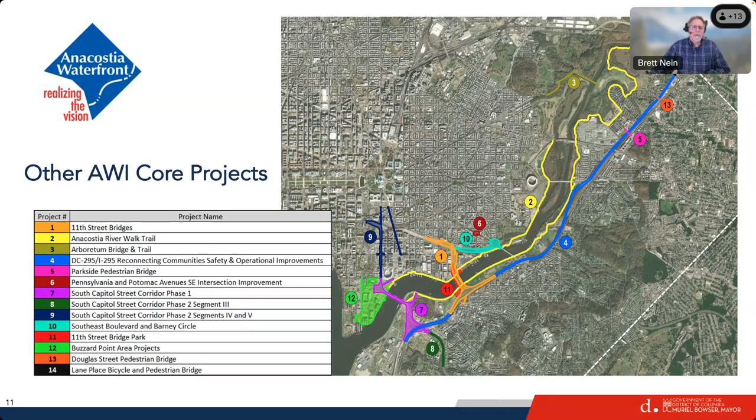So the map that I mentioned—this is the core projects, those already underway or completed and identified on this map. You'll see this project itself is tagged as number 4, which is the DC-295 study. This gives you an idea of all the different projects going on within the district. One that's very talked about recently is the 11th Street Bridge project, number 11 down in your Ward 8, where connection comes across to the corridor from 11th Street.

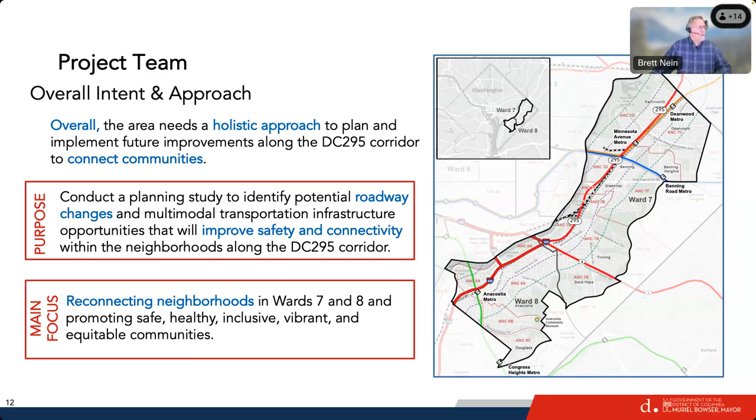It's a location-based approach, similar to what DDOT employed for the corridor project related to South Capitol Street and the Frederick Douglass Memorial Bridge, or what VDOT is using for the I-66 corridor, where improvements are underway now.

That corridor map on the right illustrates the study area considered under this scope, as well as the freeway and railways that divide it, and provide the separation between Ward 7 and Ward 8. Go ahead and switch the slide.

What we're in now is phase 1 of the study, the first study period, with phase 2 being the second. The first one is focused on considering current conditions, stakeholder interests, public involvement—that's you all—and contemporary best practices, as well as strong reference documents like Move DC and Vision Zero DC. Those have priorities we're going to really try to focus on implementing.

It will build on the previous analysis and recommendations from 2015 and 2017, where safety and geometric improvements were included in those studies. It has 5 key subtasks identified here: project management, stakeholder and public outreach, establishing existing conditions, data review and analysis, and finally the existing conditions report—in other words, creating analysis and showing what our recommendations are.

It'll be focused on things like improving access to frequent transit routes and facilities, access for communities, jobs, facilities, public service destinations, and reducing safety risk. We'll also review and refine previous DC-295, I-295 mainline and interchange concepts that were seeking to improve vehicular flow, addressing congestion concerns that create problems for you all as well. Go ahead and switch to the next slide.

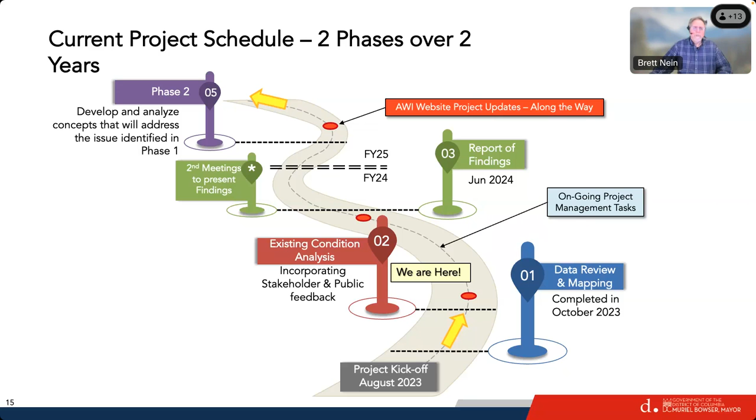Along the way, there are AWI website project updates and the Engage DC platform that Karen described. After completion in fiscal year 24 of phase one, we'll move directly into phase two, which we think will be done next year.

So go ahead and switch over to the next slide. At this point, now that I've explained the intent of the project and everything involved in the scope, we're going to transition to the map series that Karen mentioned. This covers a lot of details.

We have completed over 100 aspects of mapped corridor existing conditions. Don't worry, we're not going to show you all 100 tonight. What we're doing is focusing on the ones we think have the most impact.

Are you ready? Yes, I'm ready. Thank you.

Thank you, Brett. Good evening everyone. My name is Giri Kilim, a senior transportation engineer from Jacobs, supporting DDOT on this study. I'll provide an overview of the current status of transit coverage within the study corridor, and also the safety aspects within the study area. But more importantly, we'd like to take this opportunity to get your valuable input for the reasons Brett mentioned a few slides ago.

So let's start with the transit coverage in the study area. Next slide, please.

What you see here is there are 4 metro rail lines accessible through 5 different metro rail stations throughout the study area. To the south, within Ward 8, there are 2 stations, Anacostia and Congress Heights metro rail stations. There are no direct metro rail connections on the northern side of Ward 8 within the study area.

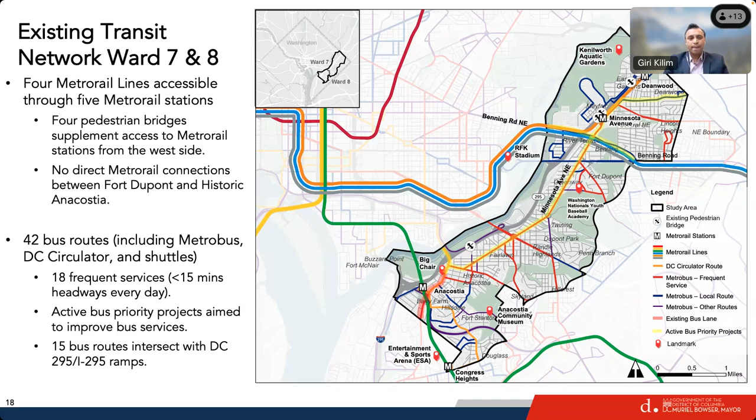What's relevant to our project within this particular focus area is that 15 bus routes actually use the 295 corridor ramps, whether on or off ramps. We are in the process of identifying any mobility, safety, or operational issues that the 295 corridor currently has that impact traffic and transit operations. When we find that, we'll document it in our existing conditions report.

Next slide, please. We also looked at the walkshed for the metro rail stations. With the Anacostia metro rail station having access on both sides of the 295 corridor, users will be able to walk to one of them within 15 minutes, even if they live on the west side of the 295 corridor near the stations. There are also pedestrian bridges being planned near 11th Street and Suitland Parkway that are expected to improve the walking experience and also improve safety for walkers and bikers.

As we continue to assess the need and identify issues and gaps, we would very much like to hear about your experiences accessing these transit services or facilities, and help us understand if you've experienced any mobility barriers that the 295 corridor poses to accessing your transit facilities.

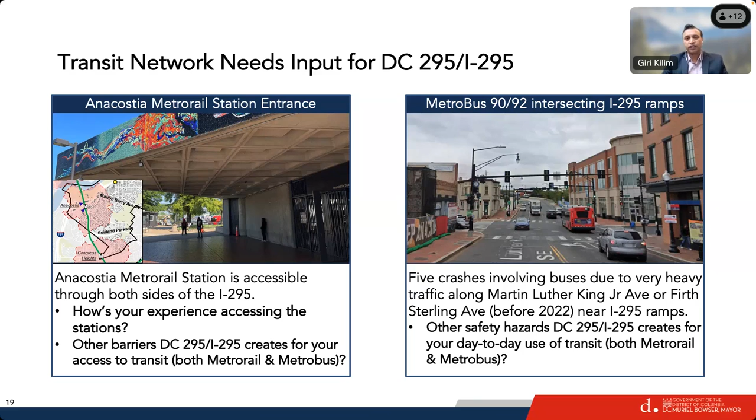We've also tried to tie in crashes related to transit, looking at crash information over the past 5 years, and there are some bus crashes near the 295 corridor. I think they're especially triggered due to heavy traffic exiting and entering the 295 corridor, especially on the northern end with MLK Junior Avenue and Good Hope Road, and the access to the 295 corridor. So we want to get your input on the safety hazards you perceive that stem from the 295 corridor or otherwise, and how they impact your day-to-day use of these transit facilities.

Next slide, please. Let's talk about crashes, which gives us data-based insights into safety within the area. We've gathered information on crashes that occurred near the 295 corridor in the past 5 years. Next slide, please.

There are over 6,600 total recorded crashes near the 295 corridor. 13 of them are fatal, and nearly 1,800 of them are injury-related crashes. The bad news is the percentage of fatality and injury is slightly higher than the district average.

But there's also good news. We've seen a decreasing trend over the past 5 years in both the total number of crashes and also the crash severity in terms of injury or fatality. That's good news, but it could be induced by the pandemic. Now with things coming back to normalcy and traffic picking up, we need to closely monitor how things pan out. This is probably the best time to pick out all the safety concerns and develop safety improvements.

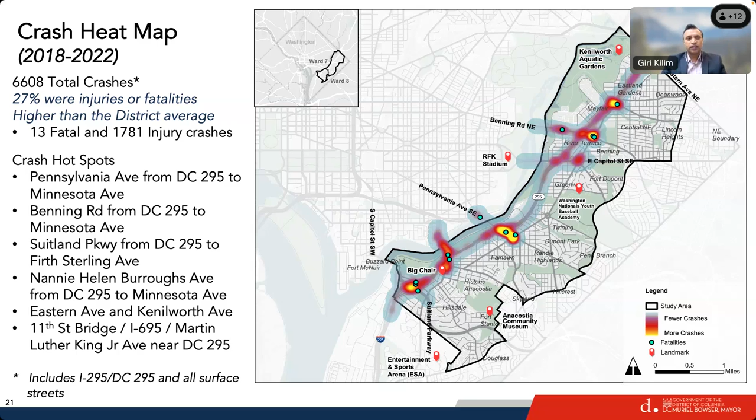The map on the right shows the distribution of these crashes around the 295 corridor. Brighter the color, higher the concentration of recorded crashes. The blue dots within those bright yellow shades indicate crashes that involved a fatality. The major crash hotspots within Ward 8 are Suitland Parkway, right by the 295 interchange between the 295 ramps and the Firth Sterling Avenue intersection, and on the northern side, Martin Luther King Jr. Avenue near the 295 access ramps.

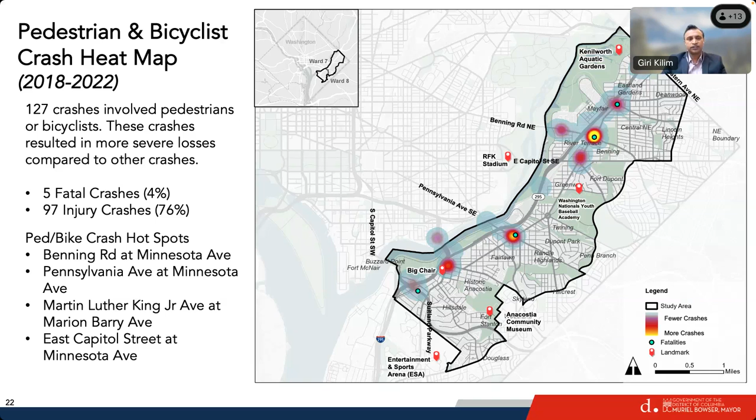We also took a closer look at crashes involving pedestrians and bicyclists. There are 127 of them in the past 5 years, about 80% resulting mostly in injuries, but 5 of them involved fatalities. These also resulted in more severe losses compared to other crashes, so this is something we need to focus on.

Again, within Ward 8, the hotspot is Martin Luther King Jr. Avenue at Marion Barry Avenue and the Good Hope Road intersection. Next slide, please.

We are in the process of analyzing crash data, and our preliminary assessment suggests there are a lot of pedestrian and bike-involved crashes at Martin Luther King Jr. and Good Hope Road with the 295 ramps, predominantly because vehicles are failing to yield to pedestrians and bicyclists. We'll have to take close attention to why that's happening and how we can help with better operations there.

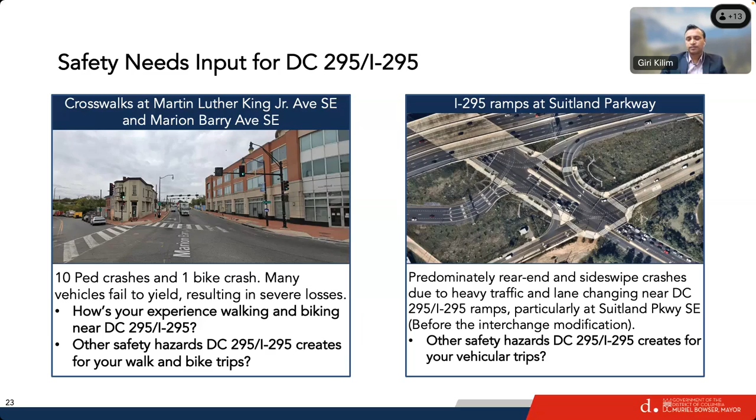Looking at vehicular crashes, the predominant crashes seem to be rear-end and side-swipe types, typically attributed to heavy traffic and lane changing on the 295 corridor and near the ramps. As we dig deeper into the reasons and continue analyzing these crashes, we'd like to hear your observations and experiences while walking, biking, or driving near the 295 corridor, so we can include your input in our safety assessment.

Now I'll turn it over to Greg to talk about pedestrian connectivity.

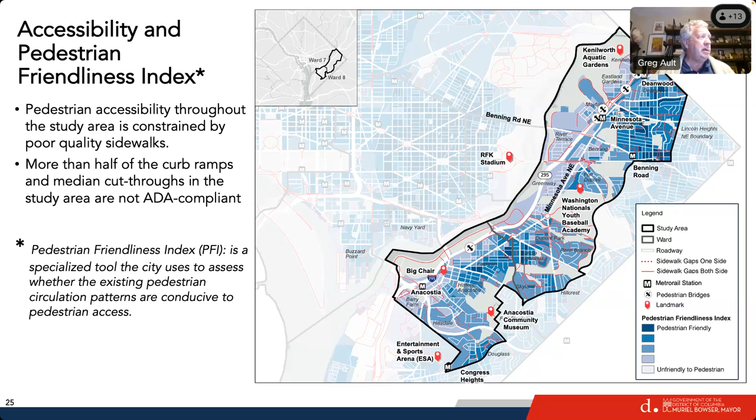So what we see is over on the eastern side of the wards, the higher PFI, better connectivity, better walkability, safer pedestrian conditions. The closer we get to 295, and in particular those folks that were cut off back in the 50s through urban renewal, which is what we're trying to heal the sins of the past and reconnect these communities, they have less than desirable pedestrian connectivity and less pedestrian friendliness.

Next slide, please. So on this one, we focus down on Ward 8 itself, as indicated on the previous slide. ADA and the PFI, pedestrian friendliness index, reflect pretty good connectivity throughout the urbanized area along Minnesota and MLK, but less connectivity along the 295 corridor, and especially getting over to the Anacostia side.

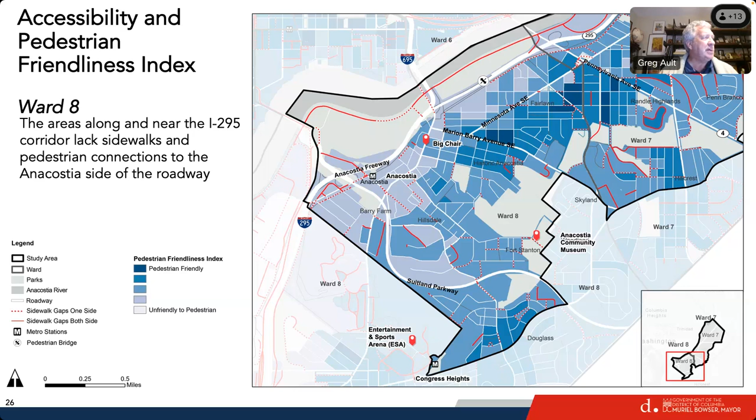We have one pedestrian bridge, as you can see on the map, near Anacostia High School and Anacostia Rec Center, and it provides access from the urban core to the open space along the river. The Howard Road sidewalk system is discontinuous as it nears the new South Capitol Street Bridge, but improvements have recently been made along the Frederick Douglass Bridge and South Cap Street and the crossing itself.

Next slide, please. So what we want you to think about, this is just an example. The distance from the Anacostia Metro Station to Marion Barry Southeast is about 2,500 feet, or about a 7.5, 8-minute walk. The route along MLK is well delineated, with good sidewalks and good crosswalks.

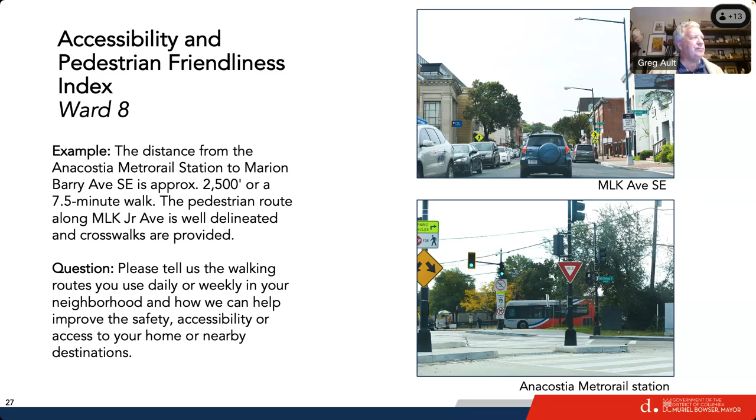So what we want you to think about, and Carol will show you later in the presentation, all the different ways that you can access us and get information to us, but especially for tonight, put your thoughts into the chat here to help us understand your situations.

Next slide, please. So the last couple of slides I'd like to talk about, the pedestrian friendliness index within the bus walk shed. As indicated on the previous maps, the walk shed indicates 15-minute walking times of over 100 bus stops within Ward 7 and 8. Consequently, the vast majority of the project site, both 7 and 8, are within this 15-minute walk shed, particularly those areas nearest the major arterials.

And what I'd like to point out, we had the blue of the pedestrian friendliness index, and as you can see now on this map, we've overlaid a yellow hatch, which shows the 15-minute walking from all the different bus stops. As you can see, most of the areas on the east side of 295 have good connectivity to the bus routes, bus stops, and the connectors.

Up on the western side of 295, in the gardens area and those areas on the west that were cut off by 295, they do not have good connectivity to bus stops. We have 4 pedestrian bridges, and there's a lot of work going on up there. One pedestrian bridge is reconstructed, 2 are under construction, and a new one is coming.

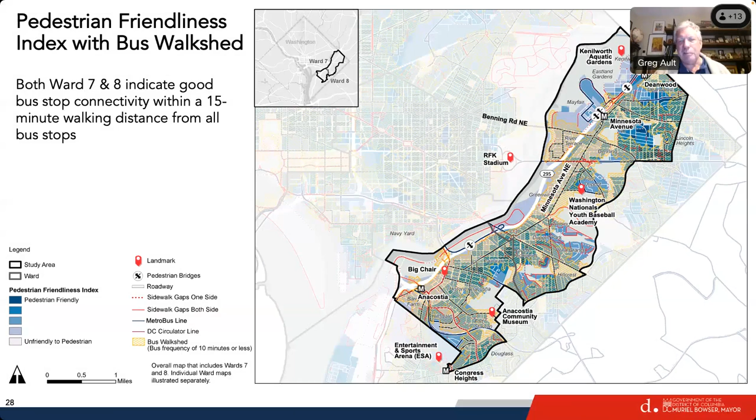The areas west of 295 are not very well served currently by the bus system, but we can imagine new projects possibly coming in Poplar Point would identify and provide some additional connectivity within those areas. The sidewalk gap condition, the red areas within Ward 8, is pretty good in the densely urbanized areas nearest to the main vehicular arterials. Some gaps are found in the less dense neighborhoods, and the connectivity along the Anacostia River is somewhat fragmented and discontinuous.

So with that, I'd like to turn it over to David to talk a little bit about bike ped mobility.

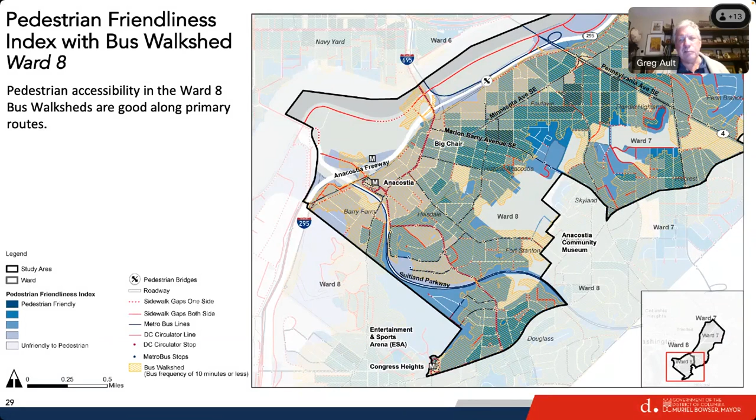Thank you. Can you first advance the slide, Greg? I think you were talking about the next slide. There it is. Go back one.

Destiny, there you go. Last conversation, you were focused on this slide, but it wasn't up for everybody to look at. Sorry, I was talking about Ward 8. Sorry, go ahead folks. Thank you.

Good evening, everybody. Again, my name is David Goodman, and my role here tonight is to explain what we've learned about the bicycle environment in your part of town, and also to get feedback on what you all feel is the experience of riding bicycles in this area.

Something I'd like to start off with is to explain that a lot of bicycle and pedestrian improvements support each other quite a bit. Very often biking and walking go hand in hand, in the sense that when you make a road safer to ride your bike along, it also makes it safer for pedestrians, and vice versa. These are considerations we're looking at in this part of town, especially considering that connectivity is not so great. Improving that connectivity and the quality of the experience is a lot of what we're aiming for.

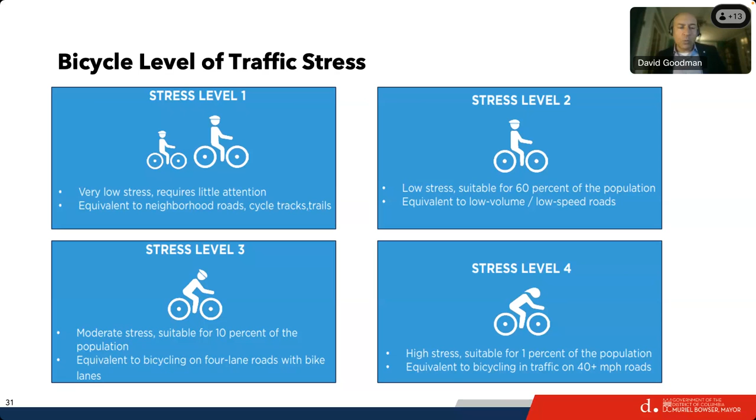So trails generally fall into a stress level 1 environment, and then it goes up incrementally to stress level 4, which tends to be places for much more confident cyclists. I'm sure you know some people who aren't afraid to ride in mixed traffic, and that's okay too. Our community is made up of lots of different people with different comfort levels, but our aspiration is to create environments where more people feel comfortable riding their bike and don't feel it's a dangerous experience.

So if you go to the next slide, we'll see what these four stress levels look like geographically. This is an overview of the entire study area, both Wards 7 and 8. Something we found, which probably won't surprise many people, is that within the neighborhoods themselves we have a lot of gridded streets, generally narrow with slow traffic speeds, which tends to translate into pretty acceptable bikeability.

What you'll see is a lot of yellow on this map, corresponding to stress level 2, which isn't the ideal environment, but is something we'd consider acceptable for many people. The majority of people who might want to get on a bike would feel comfortable in those environments. So the good news is that generally within neighborhoods, they're pretty bikeable and walkable.

But the challenge we've seen is that the major arterial roads, like Minnesota Avenue and Pennsylvania Avenue, tend to be very high stress, easily stress level 4 for many of them. That means they're not only difficult to ride a bike on, but also difficult to cross, both as a pedestrian or as a cyclist. So what we find are little pockets of isolated bikeable and walkable neighborhoods that don't connect well to each other, and a major theme we've already seen in this project has to do with connectivity — how well can people get around.

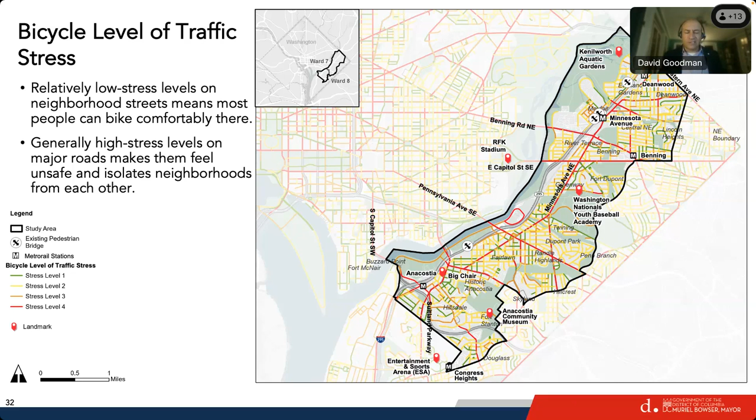If you feel like it's not safe to walk or bike, or transit isn't working for you, it tends to put a lot of pressure on automobiles, and automobile traffic comes with its own trade-offs. So we're trying to provide, as Brent mentioned earlier, environments that are multimodal and complete.

We talk about complete streets. The idea is that you create an environment where people can get around using all sorts of different modes of travel. So this little snapshot, and if you go to the next slide, you'll see a detail.

Did we have the detail? Oh, we didn't have the detail. Sorry. Anyway, as an overview, it just explains what we have along the riverfront, you see the green line there, is the Anacostia River Trail.

It has easily 5,000 or more average users on the trail, which characterizes it as a pretty well-used and well-loved trail, providing really good north-south connectivity as long as you're along the Anacostia River.

And we don't all get to use that as our main corridor of transportation. Meanwhile, other corridors like Minnesota Avenue don't really have very many facilities at all, and the ones that are there can be a little scary to use. So they're not well connected. This is something the project will look to fix, to improve connectivity of the bicycle network.

So to close out, that's an overview of what we've seen so far. We'll be drilling into the comments and the information we're gathering to really focus in on specific locations, so we'll have a better idea of what needs more detailed analysis and what locations need more serious interventions.

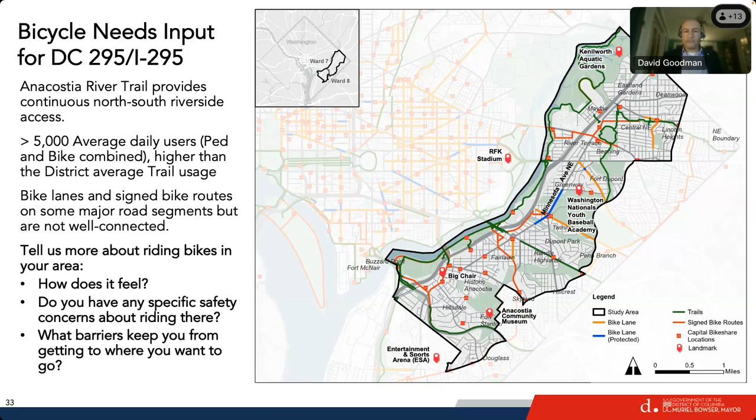It'll help us understand what needs to get addressed directly. And if there's any barriers that keep you from getting where you want to be—either a physical barrier or some other kind of constraint—we'd like to know about that as well. Put it in the chat or add to it later.

And I think that's really all I could say about this, and they'll be around available at the end to answer questions as well. Thank you, David.

Go ahead and advance the slide, Destiny. So we need to wrap this up and get the floor open for you all to provide your questions and comments. I'll recap real quickly from the schedule I mentioned earlier.

Four big things left. We've completed the data collection and mapping, as you've seen. We're now working to complete the existing conditions analysis, which your input tonight will help guide us towards the most critical concerns in our evaluations for your area.

Then we'll formulate the findings into a report and come back to you in June for a discussion of those recommendations, and then we'll proceed to phase 2.

So now I think we're going to turn it back over to Karyn. She has a few more points of information she needs to share with you so you can stay involved even after tonight. We would love to hear your comments and questions. Karyn, go ahead. Thank you.

Thank you, Brett, and thank you everybody. I can see the chat is abuzz with really great comments, thoughts, and feedback, and there's a couple of questions. We're going to get to those in just a moment.

I did want to go through very quickly further outreach and public engagement, because it goes without saying this is very important for us to hear back from the community.

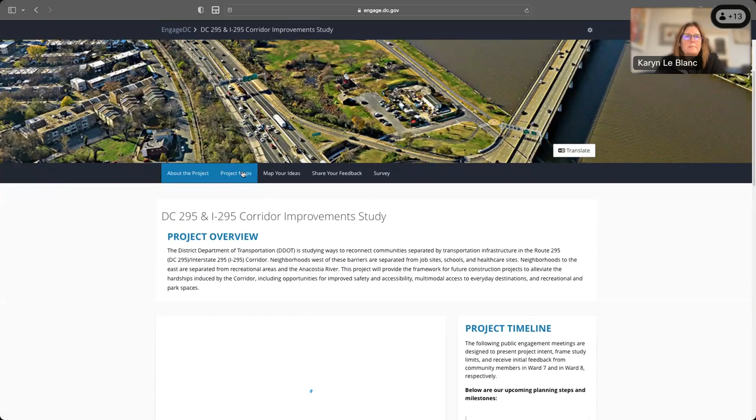You'll also see at the bottom of this page, and again later on other pages, there's a subscribe button. You don't have to put in your first and last name, but we do ask that you put your email in there, and then hit submit, and then we can provide additional information to you. You'll receive emails as we update certain things on the page and things along those lines.

There are a number of tabs here. You'll see about the project, project maps, map your ideas, share your feedback, and survey. So Destiny, if you'll click on project maps first, please.

Again, project overview at the top, but then you'll see a list here of project maps. These are the maps that we showed you this evening in tonight's presentation. We are going to add additional maps to this site in a PDF, and that PDF will provide over 100 maps that our experts and consultants have been looking at, and the DDOT folks have all been studying.

And those maps will be available as well. The nice thing about this feature is while it looks small, if you click on it, it gets quite large, and then you can actually see more details about the map. You can zoom in and out and get some more information about what you're looking at. Destiny, if you'll go to the next tab, please, this just gives you project maps and information that you can take a look at.

Then this is kind of a fun way to get more engaged. This is map your ideas. This is a real-time data gathering, feedback gathering map where you can click on one of the tabs, the little pins that you see there. There's idea, other issues, bicycle.

So Destiny, if you'll just click on pedestrian, maybe—oh, bicycle, that's fine. So if you have a bicycle concern, you can just click on it, drag it down to the map and the location, and then you can put your comment in and post with the comment, and that will post automatically to us as well. We get to see that and get that feedback. So you can see some people have already started filling in some information there, and the comments are down below.